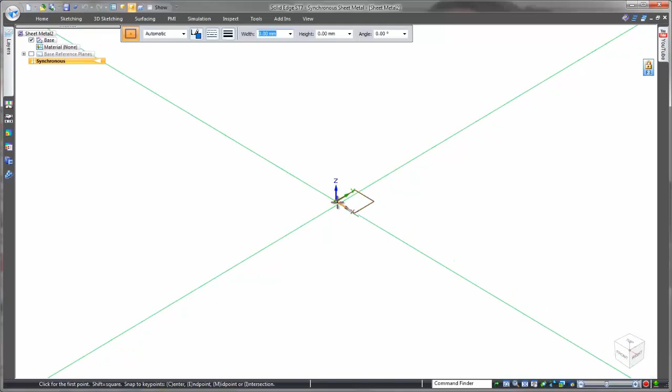I've just been briefed on a new spring clip that we need, so let's throw this design concept down. As we create this model, please pay attention to how much we work with our geometry on screen rather than clicking into commands. By selecting more than one thickness face, we can create multiple flanges at one time.

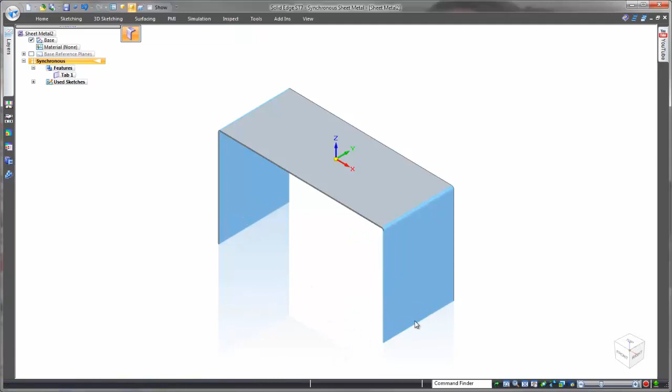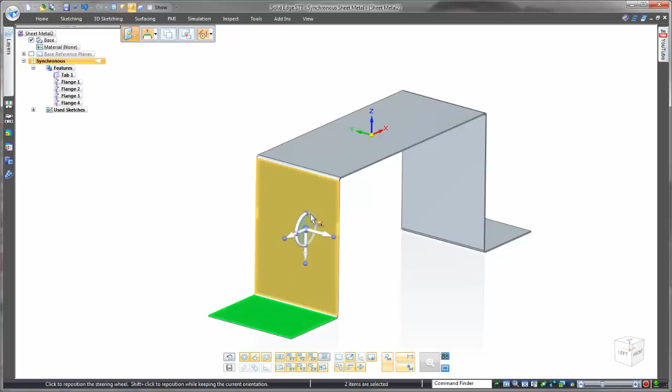These flanges were created with a 90-degree bend. What if I didn't want them at 90 degrees? Look how easy it is to change the angle of both sides.

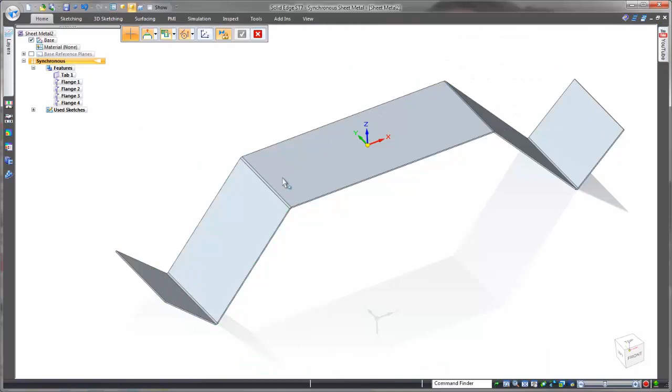Whoops, we really need this end to remain 90 degrees to each other. Solid Edge has tools to relate 3D faces like this horizontal-vertical relationship to move these flanges back to what I need. No need to undo, we have the freedom and flexibility for change.

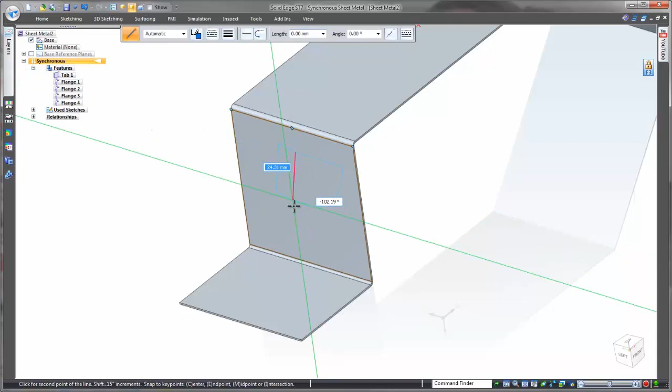On this face we need a deformed feature. With Solid Edge we can create a simple sketch, go into the bead command, input all the values needed, and just like that I have a deformed feature from a single vertical sketch line. Now tell me that wasn't easy.

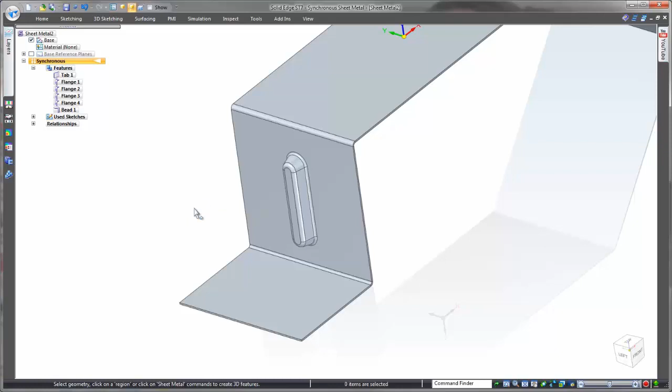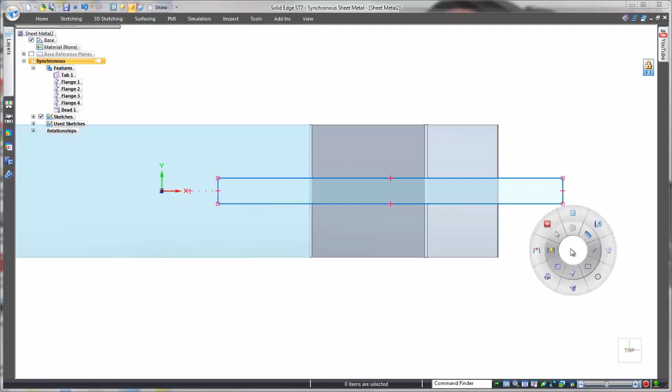On the top of the spring clip we need to add a rectangular cutout that will pass through all three of the flanges here on the right side. Nice quick way to create a rectangle, and a sketch relation will ensure that the cutout stays center. We can also place any key dimensions that we know at this point, 16 millimeters wide.

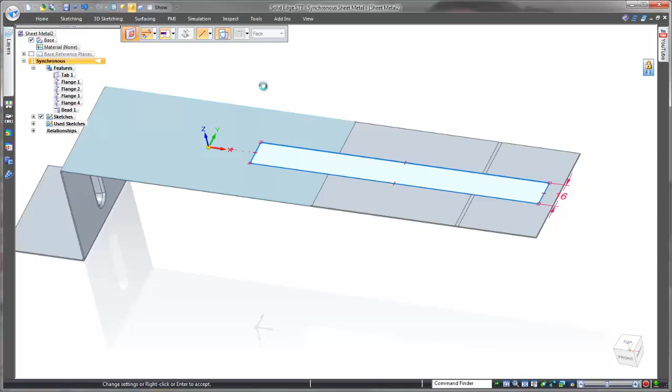By selecting the regions, we can simply pull the cutout through the part, but notice it's cutting through the end of the model, which we don't want. Instead, what we want is this same length of cut, but created before the part is bent into shape. No problem. Solid Edge can flatten a part on the fly before cutting.

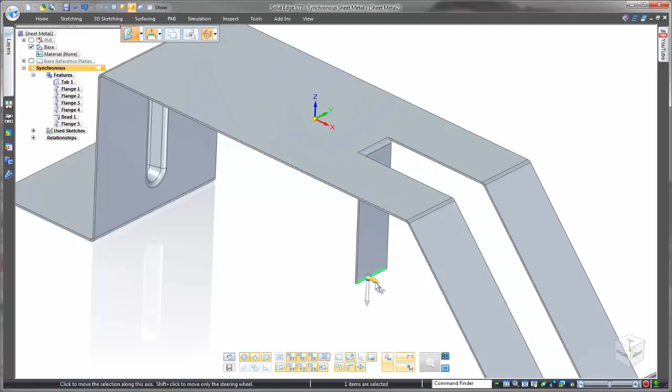In this area we need 2 additional flanges. Again, we can easily change the angle of both of these flanges with the steering wheel. This is the main control for Synchronous technology, hence its name.

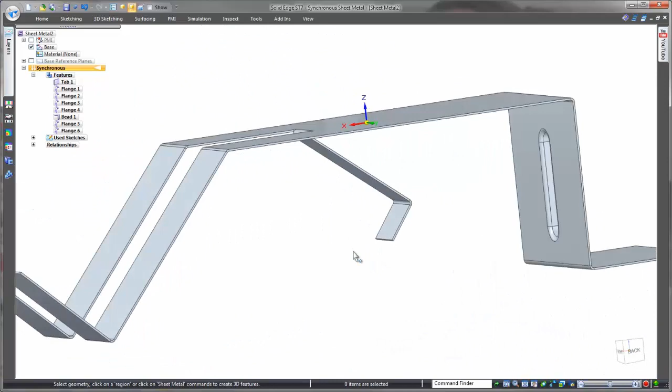Around here on this face a partial flange is needed. If we grab the small arrow and start dragging, this will create a flange. In the toolbar there are options to move material inside, and yes, to also create a partial flange instead of a full flange. One additional partial flange is needed down on the other end of the part.

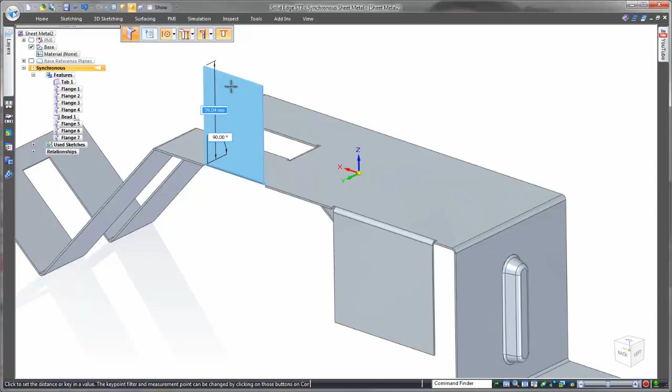But this time this flange goes upward. How about let's put the same size flange on the other side of the part? Yes, we can do that with the mirror command.

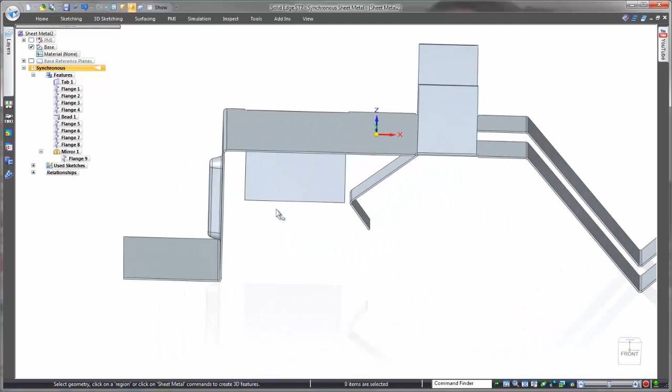When we created the very first sketch, we locked that sketch to the top reference plane. At this point I've changed my mind and decided the top face needs to be at a 5-degree angle. In most other history-based CAD systems this change would be a no-no because of fragile feature dependency. Not with Solid Edge. Pick the face, move the steering wheel, and rotate. Wow, that was easy.

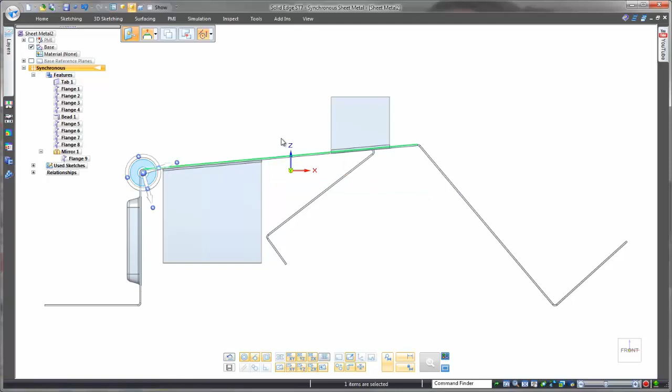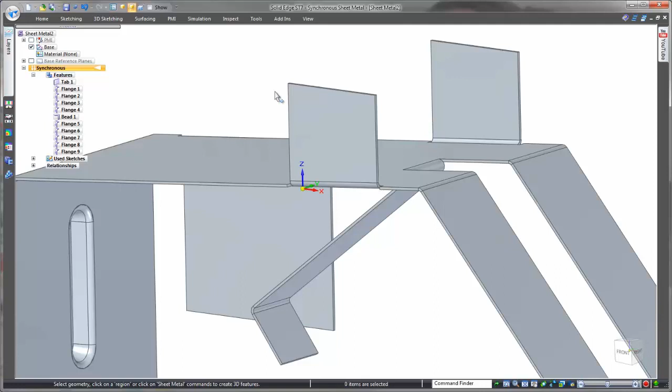On second thought, we don't want this flange to be an exact copy of the first flange, so let's break the mirrored link. Yes, even though this is direct modeling, Synchronous technology provides an organized tree with feature links where required, such as that mirror. Here we need to create a jog on this face.

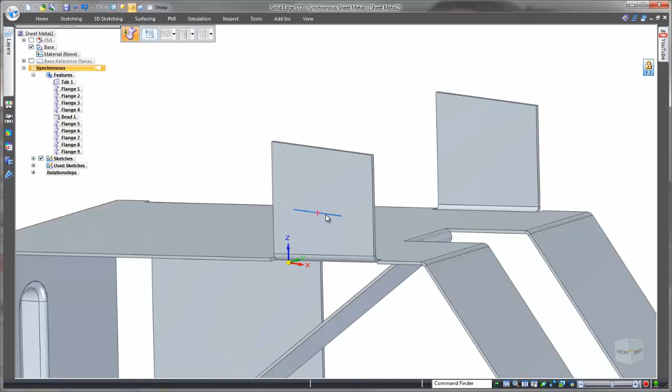Just like everything else, it's simple to create with just a sketch line. While I'm at it, this flange could use a jog as well.

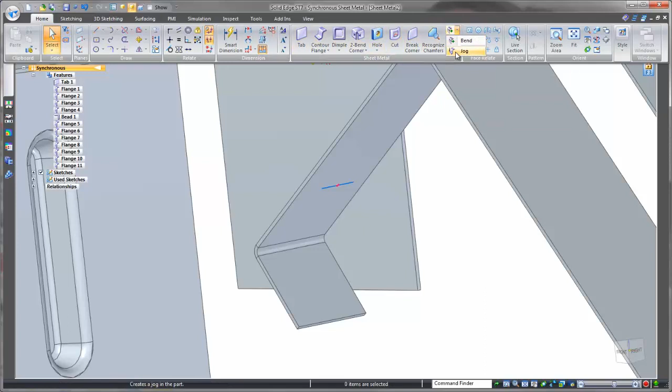Seeing as how we have all of these sharp corners, I think rounding the corners would make the part safer to work with. An 8mm face round will work.

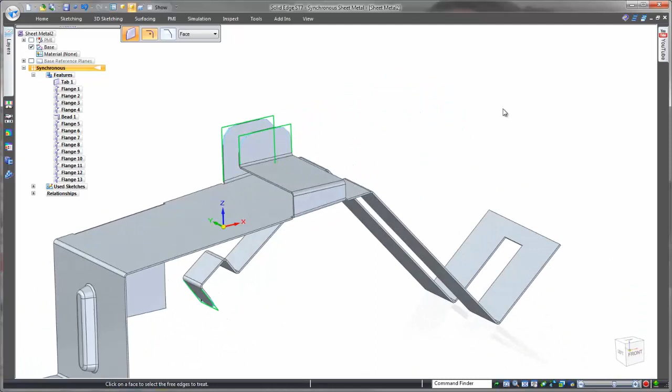On this back flange, the width doesn't need to be this wide. If we use the long arrow, we can change the width of the flange and make the change symmetrical from side to side.

We need a hem here. Watch how easy this is going to be to create. Select the edge, enter a few values, and here we have a hem.

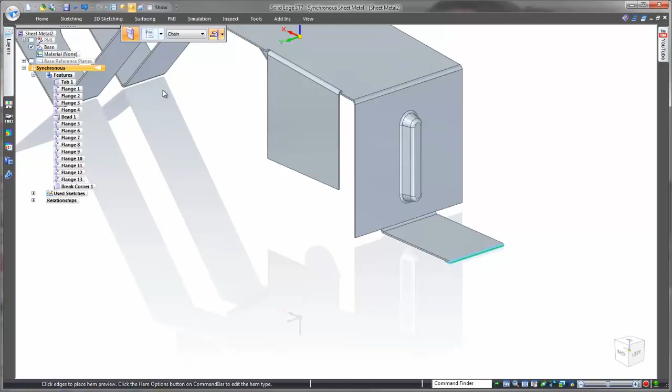So in a short amount of time, we were able to throw down this pretty complex design concept. And you'll be happy to know that even if you don't create sheet metal components like we had here, you still enjoy the same quick workflow, minimal sketching and mouse travel, but above all, ease of use.

Push and pull to work directly with the design, and remember, no need to worry about what order should I do this in. You can modify at any time too. Solid Edge with Synchronous technology, rapid design.